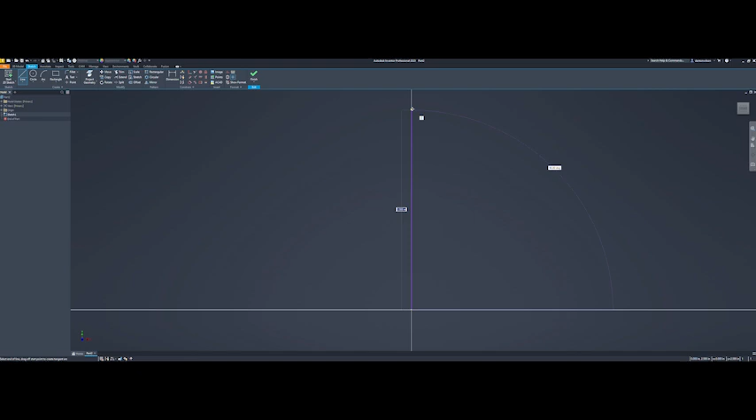So now that we're into our part, our first step, really with any revolve that we're going to be doing, we're going to need to create some type of axis. Again, we don't have to create it in the sketch, but I'm going to in this case, and it's decent practice too. But you could also use the axes from the origin. So I'll go ahead and get this line, and I'll go ahead and make it a construction line.

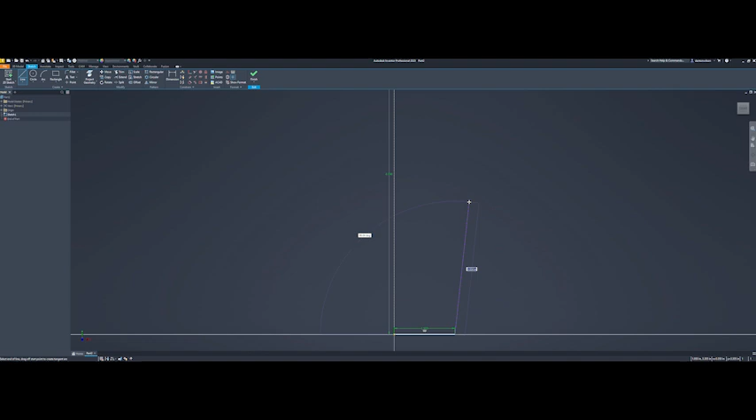So now I'll start drawing the actual outline of our cup. So we want our base to be, say, 3 inches in diameter. So in doing a revolve, you want to split that distance in half. So in this case, we'll do 1.5 inches for a radius, and then we'll draw or sketch a line coming up. And for now, I'm just going to put it there, and then I'm going to dimension it.

So I'm going to make that line, say, 6 inches tall. So we have a 6-inch tall cup. And then I'm going to also dimension the top so we can get it fully constrained. And we'll say that it will have a radius of 1.75.

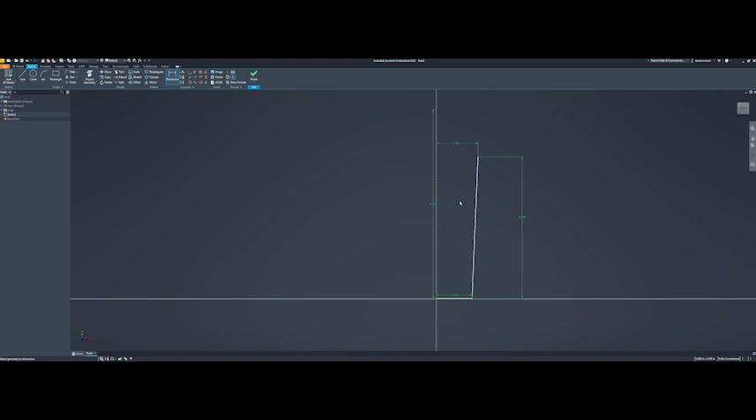So now that that's fully constrained, we'll go ahead and create the thickness of our cup. Because right now, if we went ahead and finished it, filling in the solid profile, this would create a solid piece, not like an actual cup. So we need to have that offset in there so that it will be hollow in the middle. There are other tools that you can make it hollow later that we'll cover in later sections. So we'll say it has a thickness of 0.15.

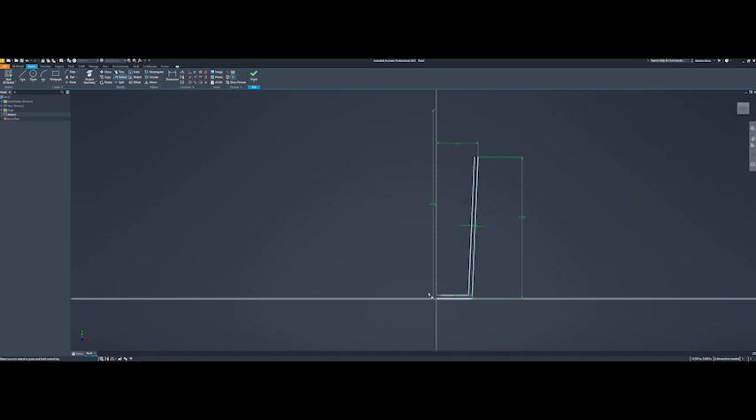So here, we don't need this line right here, so we'll go ahead and delete it. I'm going to extend this line down here to there, and now it turned purple. Once I extended it, it lost the offset reference, so I'll have to redimension this. It's still the same dimension because it hasn't moved, but it's something you'll have to do.

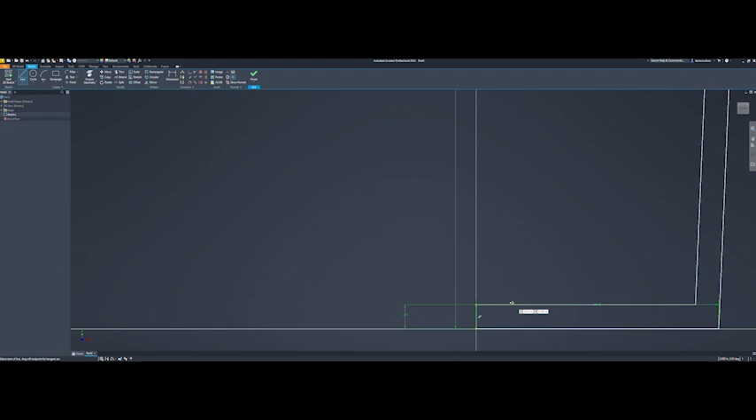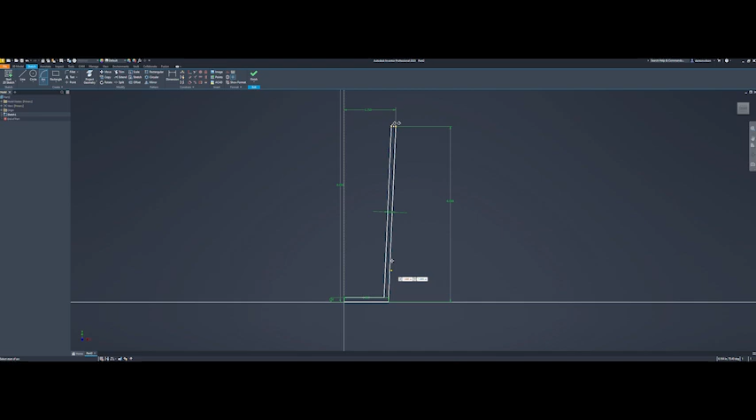All right, so now, just like we did with extrudes, the sketch does have to be closed. So I'm going to go ahead and close that right there. And then up here, instead of doing just a straight line, I'm going to do an arc. Do a 2-point arc, click both of those, and if I get the right spot, I can go ahead and make it tangent. That way, it's a nice smooth curve. And then there is our finished profile of the cross section of our cup.

So I'll finish that. And then now I'll go ahead and go into the revolve tool. I'll click revolve. And again, just like Inventor did with the extrude, it tries to pick up what it thinks you're trying to revolve. So it already highlighted this section blue. So we have our one profile, and that is fine. That is what we're trying to revolve.

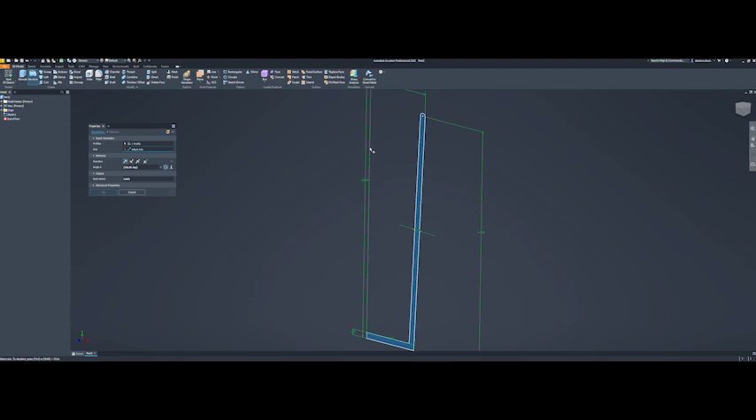So now we need to select an axis. So like I mentioned before, we could select the axes over here if we wanted to, or we can do it based on the sketch. I'm going to do it based on the sketch. And I'm going to select this. And then now you can see that it's revolving it around. Now by default, it does full, which is what this is.

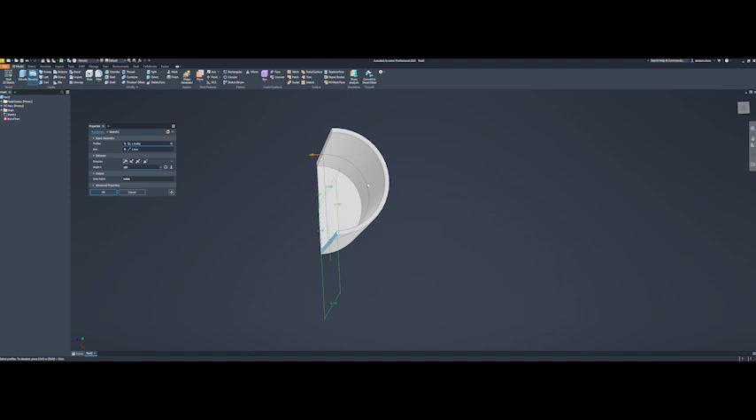And if we didn't want it to go all the way around, we could just type in a dimension here, or a number of degrees. So there's a 180 degree revolve, so it only goes halfway. Being a cup, it doesn't really make sense, but that is an option.

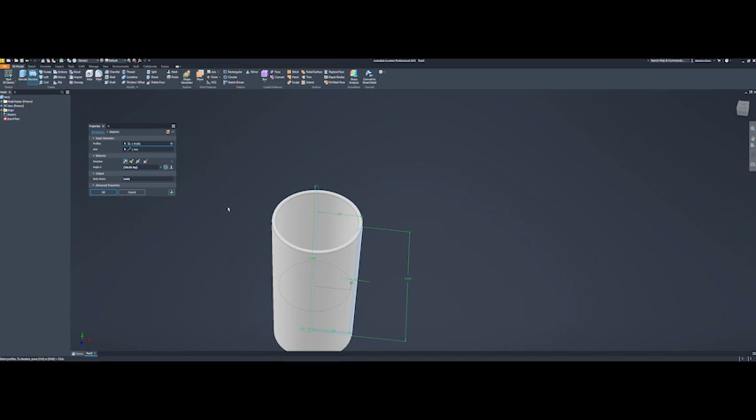The To option will also revolve it up to a surface. So if you had something else that you wanted to revolve it to, but you didn't know the exact degree, you could just tell it to revolve to that surface, and it would revolve up there. But again, we're going to do a full, since this is a cup. Then we'll go ahead and click OK. And there is our finished cup.